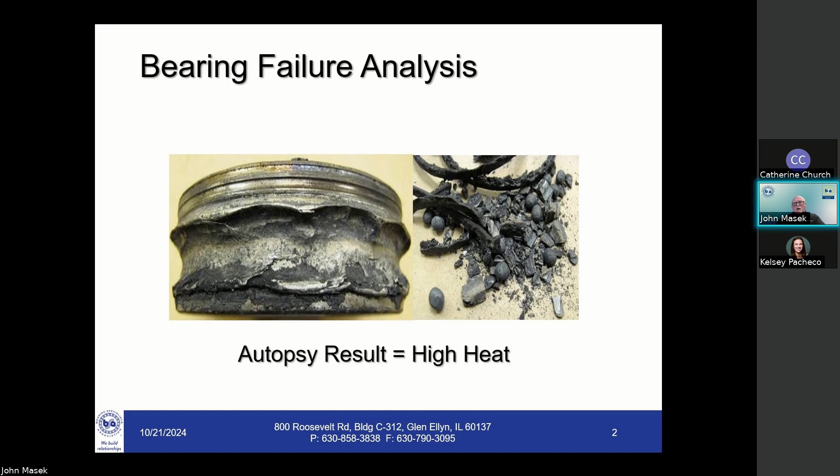So let's talk about bearing failures in general. In terms of reliability of bearings, I have customers that say, John, you sold me a bad bearing. Well, it's almost impossible. Bearing companies during the manufacturing process check those bearing tolerances and noise and their ability to spin without vibration dozens of times during the manufacturing process. So the reliability of a bearing coming out of a bearing manufacturing plant is extremely high.

Usually, if you see a bearing failure in the field, it's going to be caused from things like abuse. And by abuse, we're talking about the bearing not properly installed. Misuse would be using the bearing for the wrong application. Maybe it needs to have some type of seal and it doesn't have that, and because of that, contamination occurs. Or misapplying the bearing—talking about an application that has radial load and putting a bearing in there that can only accept axial load, for instance, would be a misapplication. So it's important that we match the bearing to the application, not only the right size, but that it really fits what you need that bearing to do.

And so we're going to be talking about a variety of different types of failures today, and we got pictures, and I'll try to do my best to explain each one of them, and more importantly, how you or your customer can prevent these from happening going forward.

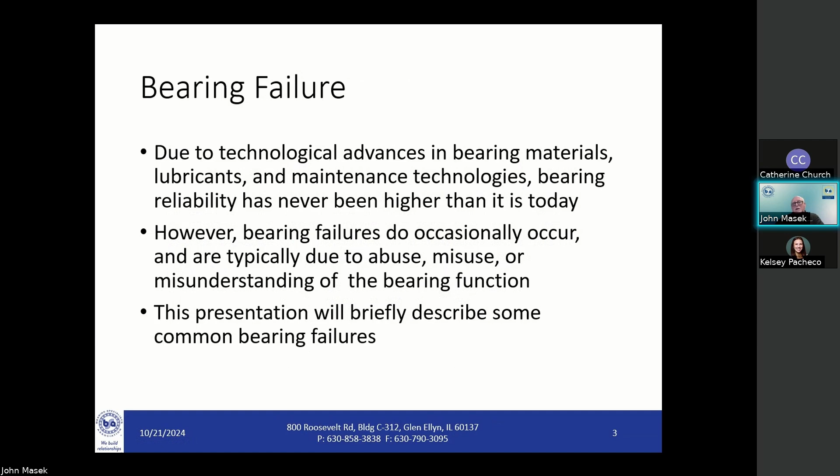So, in terms of failures in general, when someone says a bearing failed, it could be something as simple as the bearing is running hot, the bearing is noisy, but it doesn't actually stop turning. Depending on the type of end user you have, there's a lot of companies that might run a bearing until it fails, so-called run to failure. And that's usually not a good idea, because when bearings run to failure and they fail, a lot of times they'll fail catastrophically and they'll take out other components of the equipment. So you usually don't want to do that.

But other things related to failure is if the bearing seizes up or sees so much torque that it's no longer able to rotate properly, or if the bearing is no longer able to hold its position. So let's say that the bearing is seeing a lot of axial load, and because of that, the inner race of that bearing is shifting over in relation to the outer race, and it's beyond the capacity of that bearing to handle that, then that's going to cause heat and failure. It's going to cause things like run out or wobble that could happen in bearings. We'll be covering that in another class. I already mentioned about excessive noise or vibration.

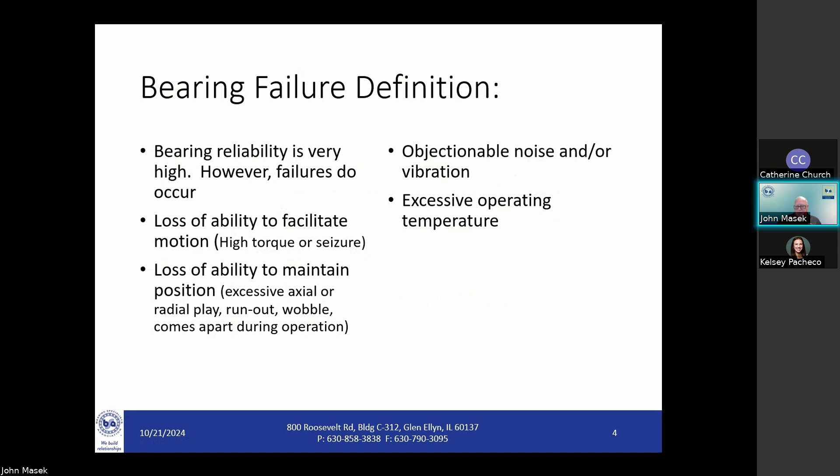Why do you want to avoid bearing failures? It's kind of a silly question, but sometimes bearing failures can impact safety concerns. If something breaks on a piece of equipment, let's say it's an elevator motor, you don't want a failure on an elevator motor when people are in it.

More commonly, it's dealing with downtime. In a typical manufacturing plant, a particular machine can have downtime costs in the thousands of dollars an hour, and in some cases thousands of dollars a minute. We want to avoid those at any cost. So, lost production - in an automobile manufacturing plant, for instance, when you're moving cars that cost $40,000 or $50,000 a piece, and your assembly line goes down because your bearing failed and you're down for an hour, that could be millions of dollars in lost production.

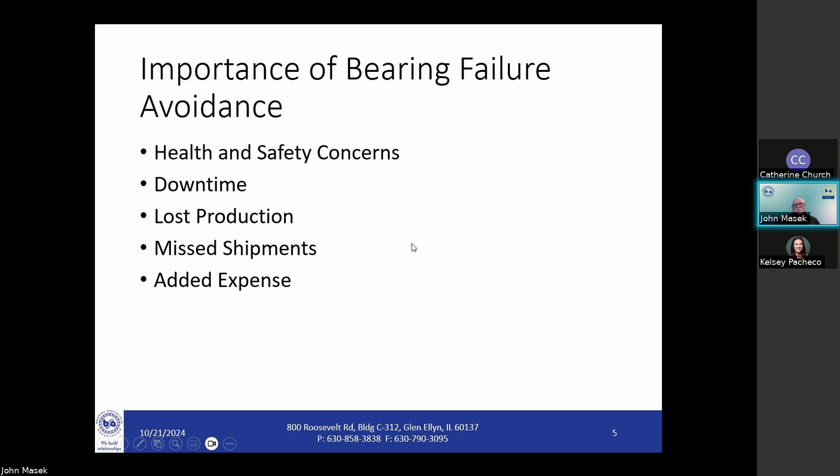Obviously, missed shipments to customers. If we're in a food plant, a lot of times the food's got a shelf life - that's a problem if your bearings fail prematurely. And usually when they fail, it's extra expense to go ahead and change them out. So making sure that we understand bearing failures, why they happened, and how to prevent them in the future is really critical.

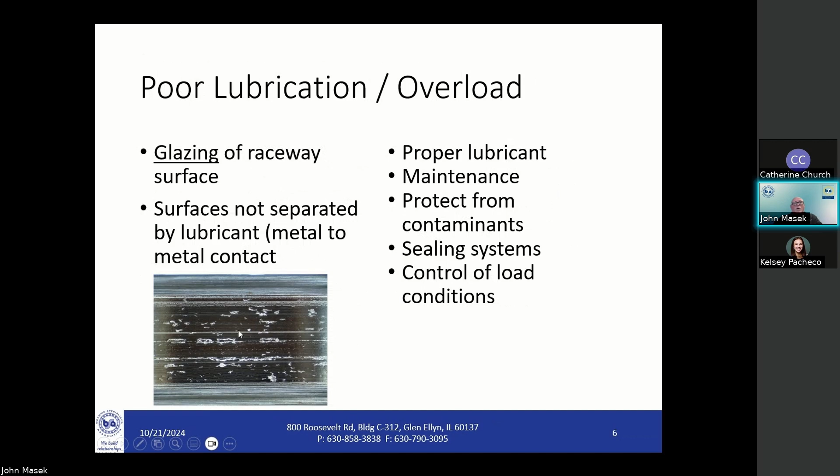What's this caused by? Could be everything from making sure I have a lubricant with enough viscosity to keep those surfaces separate from one another, to maybe not lubricating that bearing often enough, or lubricating it too much. Making sure that the bearing is properly sealed is important - this cylindrical roller bearing, for instance, does not have its own seals available, so you have to have auxiliary oil seals to protect it. Maybe the seals die - seals have a life that's only about 10% of the life of a bearing, so sealing systems can fail prematurely and cause bearing failure. And if the bearing has too much load on it for its size, that can also be a problem, where overloading can start the deterioration process of the surface.

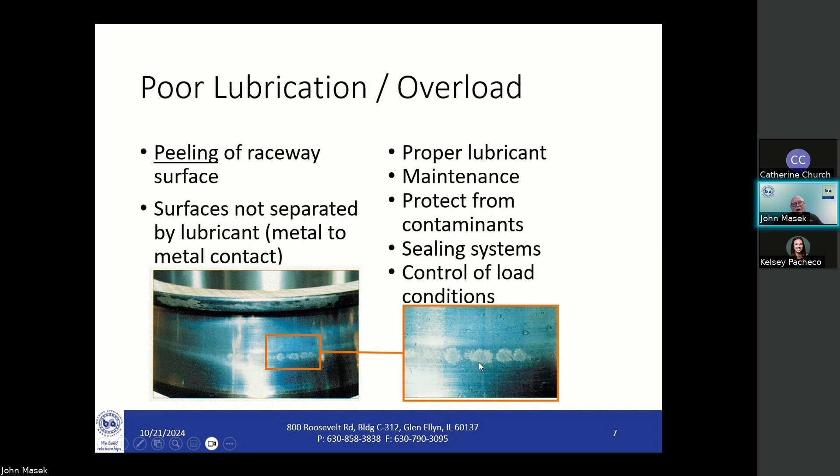Some of the other conditions shown here are the same ones as on the previous slide. Over time, a small spot like this will create a much bigger hole in that bearing - the spalling I referred to - which is really severe bearing damage and will show up as noise, and potentially, if left untreated with the bearing still operating, will eventually create a catastrophic failure.

Here we're seeing particulate contamination where debris gets into the bearing. Debris could be something as innocent as wood or textile threads. If we think about internal clearance inside bearings, you're talking about often less than 1/1000th of an inch. So even a small diameter textile thread is somewhere in that range, and that can create a high point when the ball or roller passes over it. It's treated like a piece of contamination, and over time that wears on the steel and creates a small dimple or mark.

This is from particulate contamination. Eventually these little microscopic dents are going to create big giant holes. Here's a large spall beginning to form on this bearing. So little tiny debris will eventually cause much larger damage to a bearing.

This usually is caused by outside material working its way into a bearing, usually because a seal on the bearing failed. It was damaged during installation, or it's worn out because, as I said, seals fail 10 times faster than the bearing does. That can cause premature failure, or even the cleanliness of the lubrication when it's installed inside the bearing matters. If it's not perfectly pristine, that will cause bearing failure just from the lubricant itself.

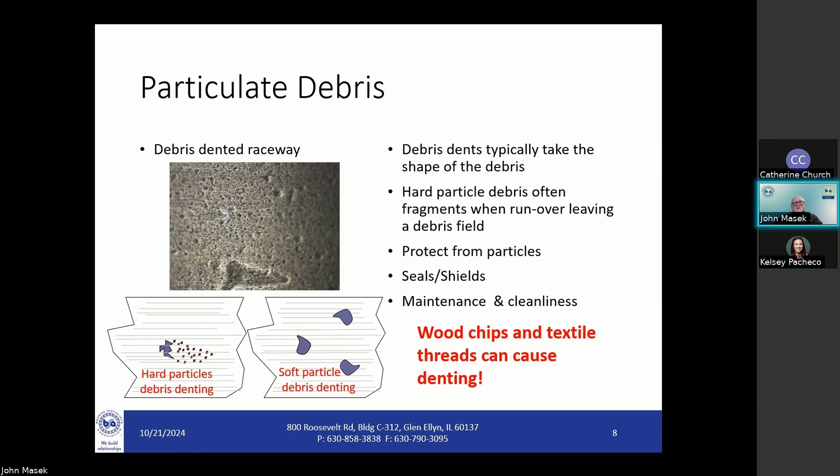So there are a lot of different ways that particulate contamination can occur. Usually it's seal related, and it's really important that when you repair that bearing next time, you replace the seals as well as the bearing.

Axial Brinells are shown here. They're kind of a triangular shape, and this is where the ball actually takes and removes material off the raceway itself. This occurs from overloading of a non-rotating bearing in an axial direction. If I push hard enough, like I'm showing here, where the shaft is pushing from the left against that and pushing the ball up against the outer ring, in some cases, particularly on an angular contact bearing — this is a deep groove ball bearing I'm showing here, but an angular contact bearing has part of this outside shoulder removed — that ball can actually pass right over the edge and create a Brinell.

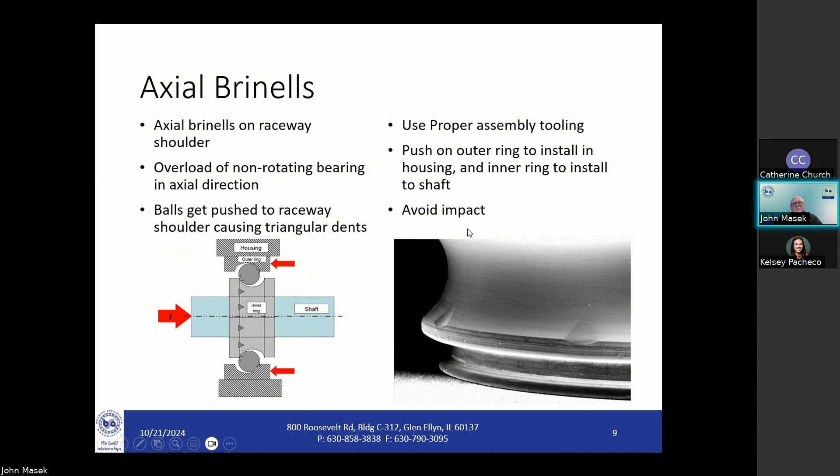A lot of times this happens during the installation process. If a bearing is being pushed onto a shaft and it's not being pressed through the inner race, and instead somebody's installing it by pushing against the outer race, that will create enough force to actually dent the raceway on the outer shoulder. So using proper tooling, pushing on the proper ring, and also avoiding any impacts — not using a hammer and punch to try to put your bearing on — those are all good ways to prevent Brinells from happening during installation.

Radial Brinells are oftentimes due to overload. Radial Brinells relate to little oval marks where the ball under load is pressed up against the raceway and actually dents it. This can be caused from a variety of different things. Here they're showing it where there's really no internal clearance between the ball and the raceways. A too tight fit or too tight installation can cause this, or impact loads can also cause Brinelling, these dents, to occur.

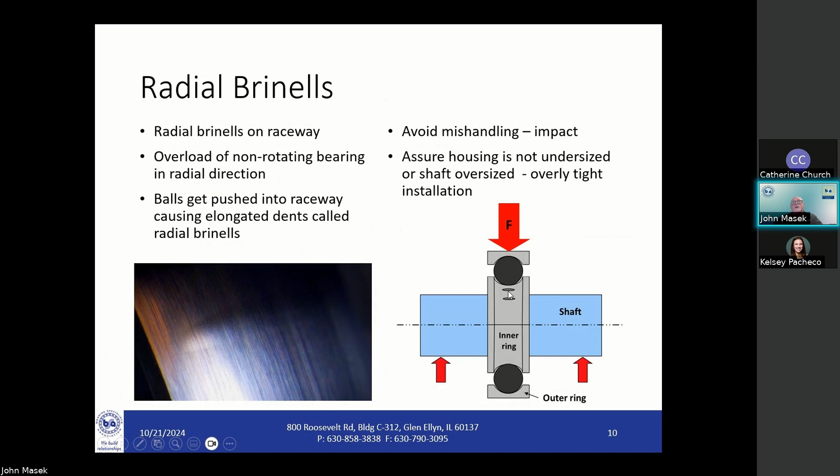False Brinells are an interesting type of bearing damage. False Brinells occur when the bearing is not rotating, it's stationary, and it's exposed to vibration. I had a customer one time where they had a machine that was sat idle for several years, and the bearings were in it. The bearing machine was in a stamping plant, and they were doing a lot of heavy-duty stamping, making fenders and hoods for cars.

At some point, a couple years down the road, they decided to use this machine again. They turned it on and experienced a bearing failure really quickly. What actually happened was, while that bearing was sitting there installed, the ball would rub back and forth due to vibration against the inner ring or the outer ring or both, creating damage to the raceways at ball spacing or roller spacing. It's called false Brinelling.

It's not done from improper installation, and it's not done from anything while the bearing is rotating. It's strictly while the bearing is stationary and under some kind of load and vibration, and it creates little damage right at roller spacing or ball spacing. Then when you fire up the equipment and start running it, false Brinelling will lead to severe spalling in a very short period of time, because you've damaged that raceway, and you get repeated damage that exacerbates really quickly.

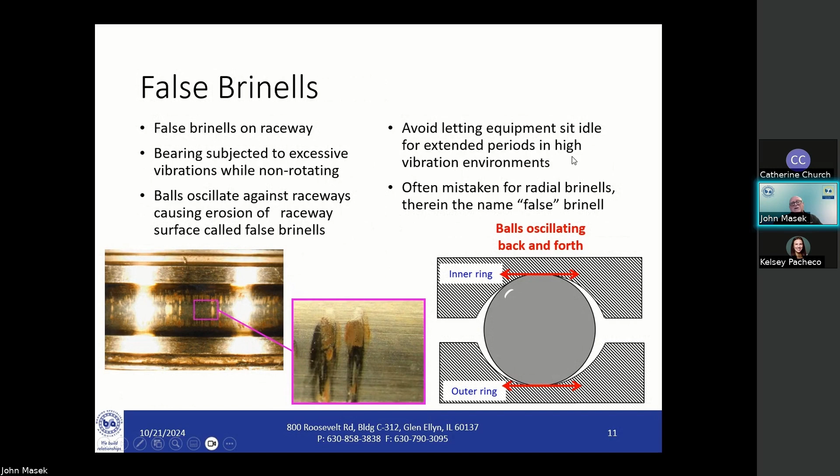False Brinelling can be avoided by making sure your bearings are stored and shipped properly. I had false Brinelling occur because a big, large bearing was transported via train across the country and wasn't stored properly in a box, and we got false Brinelling during the shipping process. So it's really important, if you have idle equipment, to periodically jog or run it, just to make sure the grease and lubrication gets circulated throughout the bearing, so that you don't have those rollers continually creating damage in a single spot.

Corrosion. Here we got an example. This is an inner race out of a spherical roller bearing. You can see it's got two rows of rollers here with a center rib, and they're kind of curved or spherical in nature. Right here at roller spacing, you see damage or corrosion.

Usually when you see black staining on a bearing, it's indicative of water getting into the bearing and creating that black stain. Condensation or water will lay there underneath the roller and oxidize that surface, creating a dark or black appearance. If I were to run this particular bearing, I would get severe damage occurring right at roller spacing, and that's what we're seeing here. We're seeing after this was run, you get this.

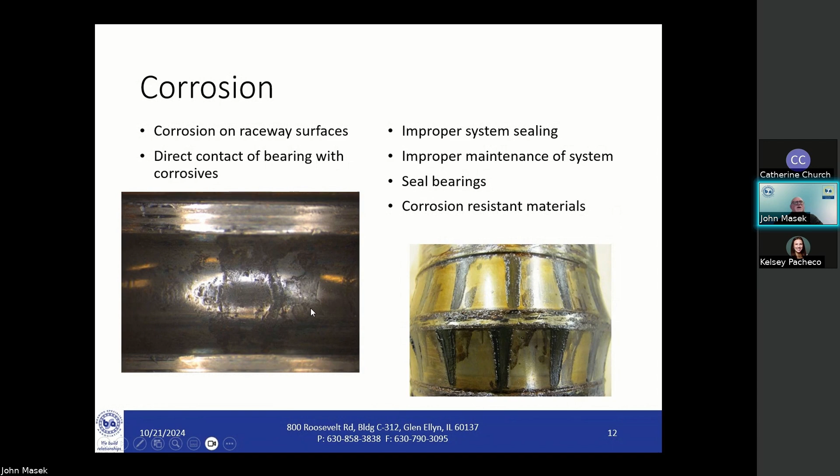It can happen because the system is not properly grounded, but it does happen quite a bit from welding. Then when that motor or the equipment fires up again, because of the damage to the raceway, you will get severe failures that happen very quickly, right at ball spacing or roller spacing, right where the electrical discharge mark was made on the raceway.

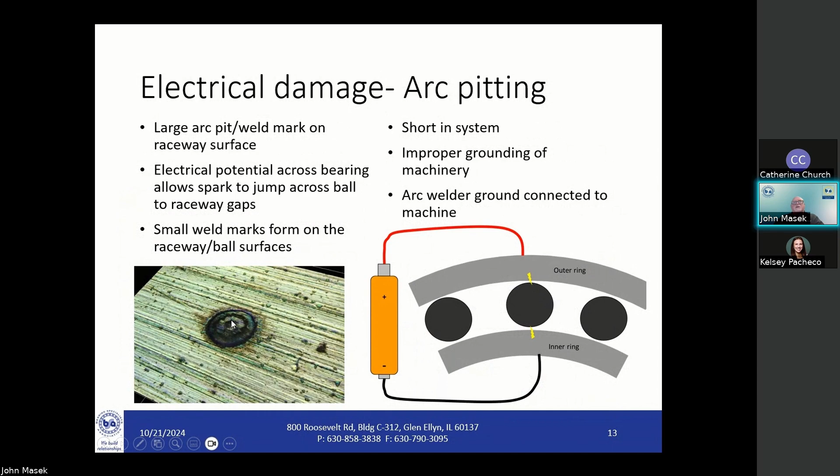Now, electric arc pitting happens when the bearing is stationary. What happens if electric current flows through the bearing while it's operating? Well, then you get something called fluting. This is one of the more common bearing failures that we're starting to see, because more and more electric motors in manufacturing plants are driven and controlled by something called a VFD, or variable frequency drive.

Variable frequency drives kind of operate like a rheostat in your dining room - a dimmer switch, if you will, where you want to turn down the lights or turn up the lights. That's basically what a VFD does, only it changes the speed of the motor.

The bad thing about VFDs is they create what's called stray currents, and you get stray electrical discharge that happens out of these little controlling units. That can pass through an electric motor, and the path of least resistance is oftentimes right through the bearing. So while the bearing is turning, if you have electric current that flows through it, you get a nice little pattern here of damage, kind of like a washboard surface, or like a sine wave that just keeps going back and forth all the way around the entire bearing on both the inner and outer race.

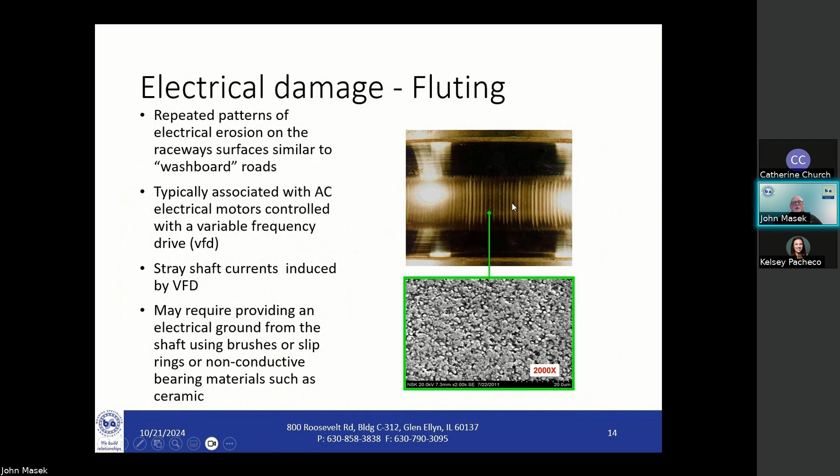Another good solution is hybrid bearings, or ceramic coating on the outside race. So this is, again, a very common, more frequently occurring bearing failure that we're starting to see more and more because of the use of VFDs. More customers are aware of it and are taking steps to prevent this from happening by either buying a grounding ring or putting in bearings that have ceramic balls or ceramic coating.

Excessive axial load when a bearing is operating, especially here, there is so much axial load. Axial load is thrust load, or load that comes parallel to the shaft. So it's going to push one of the races off to one side, which will cause a ball to roll up on its shoulder. So the race path here, which should be right down the center of the groove, instead will be off to one side.

And in this particular case, it was hot enough that it actually hot formed the metal and pushed the metal all the way up onto the shoulder of the race path. That's done because the heat gets so great that the material will actually start flowing.

Oftentimes this is because of the stack up of where the bearing goes in. The inner and outer races aren't perfectly in line, and one of them shifted off to one side in relation to the other. That can cause the ball to not roll down the center of the raceway. It's pretty easy to see, and a lot of times it's due to maybe a spacer being the wrong length, or something missing, causing that bearing to be uneven, so the balls won't roll down the center of the path on both races.

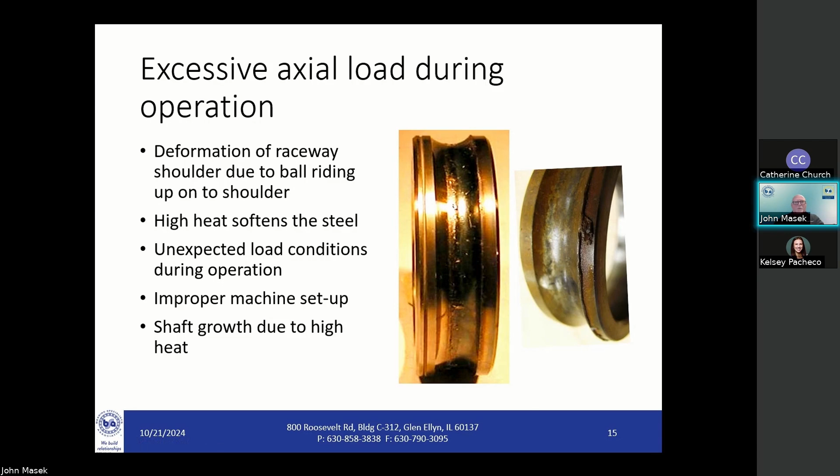Handling damage. Here we've got a bearing race that has chip marks. That's probably more common, where you're going to see an impact load during the installation process. Somebody used a hammer and a punch to try to put a bearing on. This kind of damage is directly related to maybe inexperience of a maintenance person who really doesn't know the right way to install a bearing, or doesn't use heat to install a bearing, and tries to use force.

And when you see impact damage like this, you'll often see brinells in a bearing as well, because the balls will dent the raceways due to that blunt force the bearing sees from a hammer or the wrong tool.

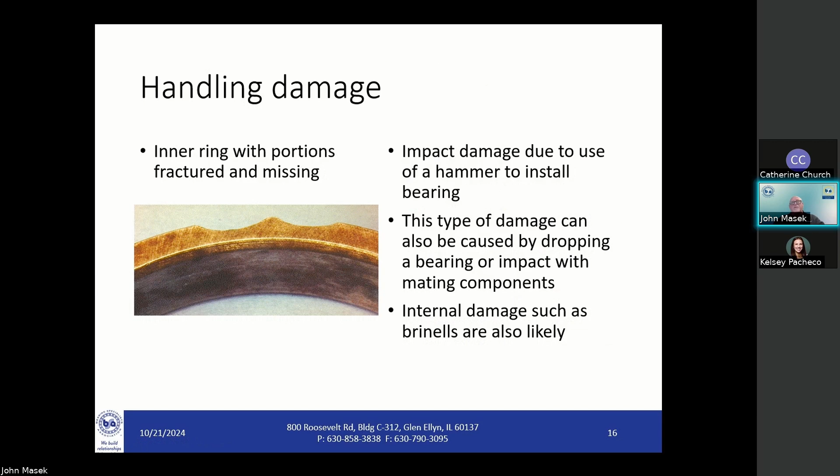Cracks. Here we have, again, a spherical roller bearing in a race. You can see the little bit of curvature here, that's where this bearing is going to be self-aligning, but you see this little split at a slight diagonal going all the way through there. That's a pretty common indication that this bearing race was stretched so much when it was put over the top of a shaft that was maybe just a smidgen too big.

When the shaft is too large to fit inside the bore of the bearing and doesn't have the right tolerance or fit, that bearing race, typically through-hardened steel, will crack. Seeing this kind of split on a straight line like that typically indicates too tight of a press fit. Fitting practice is something that's really critical.

The machinists, if the shaft is damaged and they have to remachine it before putting the bearing on, need to be educated as to what tolerance range that shaft should be machined to, to mirror up to a bearing, and it's very application dependent. It's a failure you commonly see because the shaft is the wrong diameter.

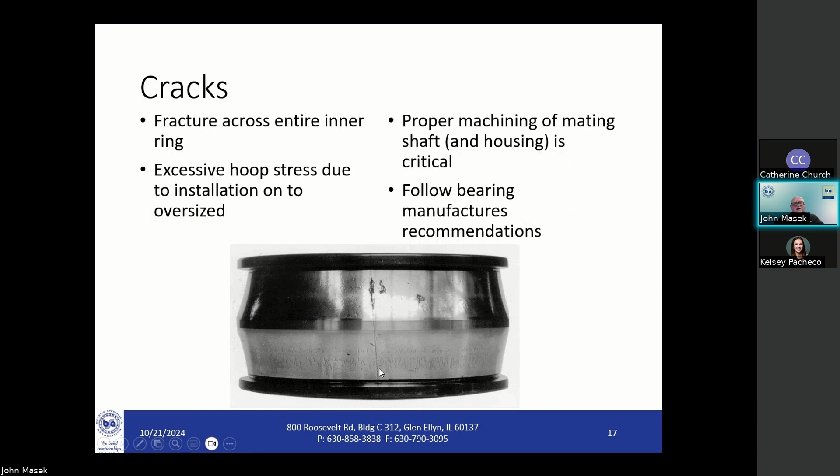Surface initiated spalling. This is advanced damage to a bearing. We've got a couple different types - this is spalling happening kind of at ball spacing here, and here is spalling occurring all the way around the bearing. But notice this is, again, one of those double row spherical roller bearing races. All of the spalling damage is occurring on one side - this surface is really pristine looking, this one is really heavily damaged. That tells me this set of rollers was under load while this one was not, so there were probably some axial loading issues.

This particular bearing is unique because it comes with a tapered bore in some cases. This could be a situation where the bearing was installed with too much taper, relieving all of the internal clearance on one half, or one set of rollers, causing this severe spalling damage.

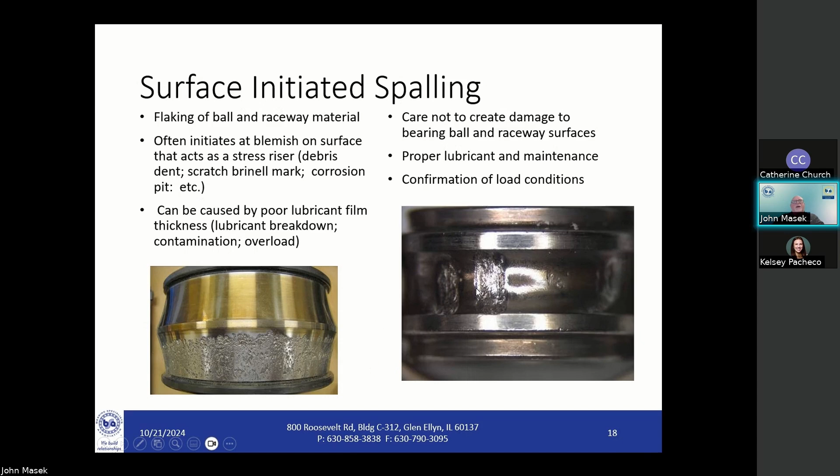This one could be starting out as impact loading, where you've got a small brinell, and then over time, through millions of revolutions of those balls going throughout the bearing, you'll actually get severe damage right at the spacing where the original brinells occurred.

Misalignment. It's kind of hard to tell, but if you look at the damage to this bearing, we've got damage at this part of the race down here at the bottom, and then severe damage here on the top. So really the ball is running at a diagonal path throughout this bearing, and that will cause spalling on opposite sides of the raceway.

This is an indicator that this bearing is mis-installed on the shaft. A lot of times bearings will go up against the shoulder on the shaft and need to be seated all the way against that shoulder.

Actually, two different diameters - one with the bearings on, and a bigger diameter where the side face of the bearing can actually go up and butt against to locate the bearing. If you don't put the bearing all the way up against that shoulder, that can cause misalignment. Or if the shaft itself is damaged or bent, that also can cause misalignment.

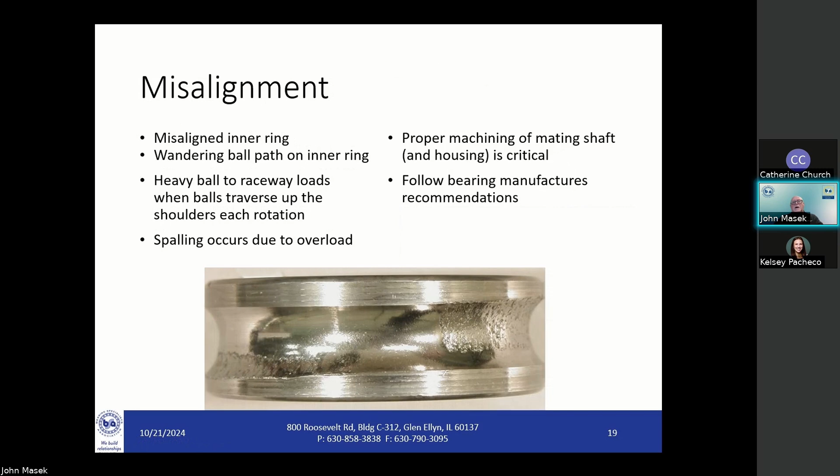The spalling is going to be reflective of the overloading condition on both sides of that bearing, because when the bearing is misaligned, the outer race and the inner race are at an actual angle to each other instead of being exactly parallel - that's when you start seeing misalignment damage. So it's very important that you look at the equipment overall to see that the housing and the shaft are properly aligned, and that the shaft is not bent, causing the bearings to be misaligned.

If you couldn't hold your hand on it, then oftentimes you knew it was running too hot. In this particular case, that's like 120 degrees - this is seeing 500 or 600 degrees. And so we know we've got some problems.

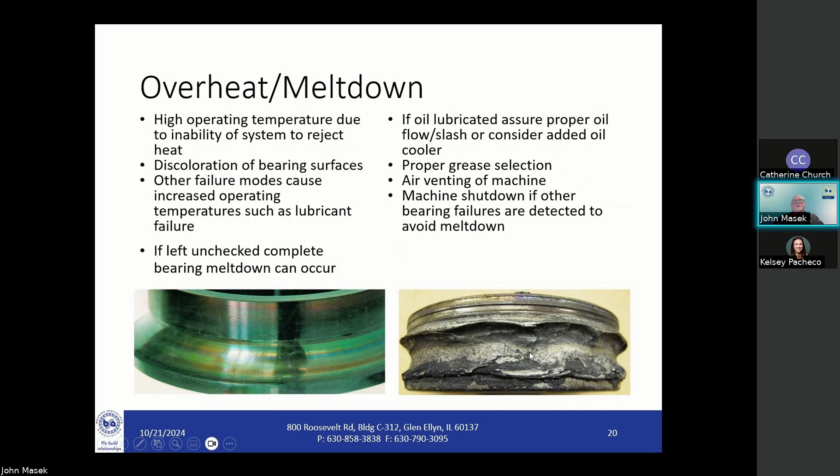So we've explored a lot of different types of bearing failures, and the thing you should take away is that bearings are designed for a long life. The most I ever came across was a bearing that lasted 47 years in an application where they were running 16 hours a day. So bearings, if they're properly maintained and properly installed, can last a long time.

Most bearing applications are designed so that the bearing can last at least 30,000 hours, which is 3.5 years of continuous use. But despite that, that's theoretical life. The real life is that bearings are sometimes installed by people who don't know what they're doing, who don't know how to properly lubricate them, and there's other damage on the equipment that can contribute to bearing failures, along with vibration. There's a myriad of different things that can happen that would cause bearings to fail prematurely.

A lot of times that's due to things like lubrication, which accounts for almost half of bearing failures. A third of them occur because of misinstallation, or people who aren't quite sure how to put a bearing on. About 20% of them are because the seals fail. So just those three things are typically all preventable.

By doing a good job of having proper maintenance practices and people who are properly trained, we can really cut down on the amount of bearing failures that customers will see - making sure we handle the bearings properly, and have a good preventative maintenance program so that they get relubricated on a regular basis. Those are the best ways to really avoid bearing failures.